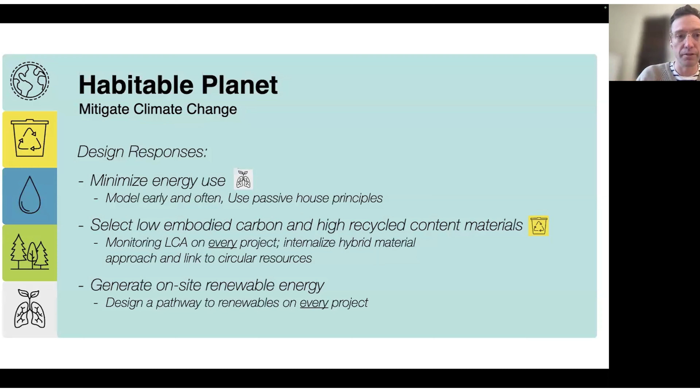Circularity was about, how can we be sensible about the stuff we already have, reuse it, and design for a future where our designs are the stuff we'll already have, and being conscious of that kind of time cycle, both forward and back. And you can see these little icons on here. It was even interesting to us as we developed these criteria and developed metrics for them, that they started to become very intersectional, like these different buckets of assessment were supporting each other.

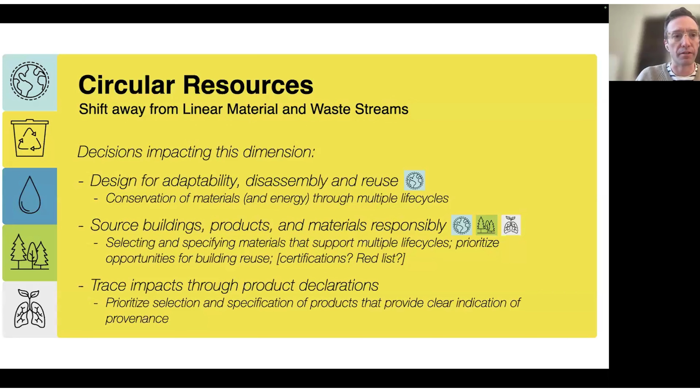And of course, we know that a little bit from passive house just through the attention paid to ventilation and how beneficial that is, both from an energy standpoint, but also from an occupant health standpoint, right? And that was like the kernel of this, to create some sort of intersectional framework. It extended through to water, being sensible about protecting our water cycle and mitigating potential impacts from the water cycle and into the building. Resilient ecosystems, so thinking more locally about the site around the building, how we can be very careful about our human-only footprint, the same way we're very careful about our human-only energy use, right? Again, starting to create these parallels between different things.

And then lastly, and honestly, this is the one that excites, I think, more of our clients than any other, is an attention to the stakeholders we serve. So ultimately, as designers in these projects, we're tasked with creating a reality that is hopefully a positive impact for the stakeholders' lives that are going to use the building. And that's the case with any scale, right? It can be all the way down to residential, all the way up to large public buildings.

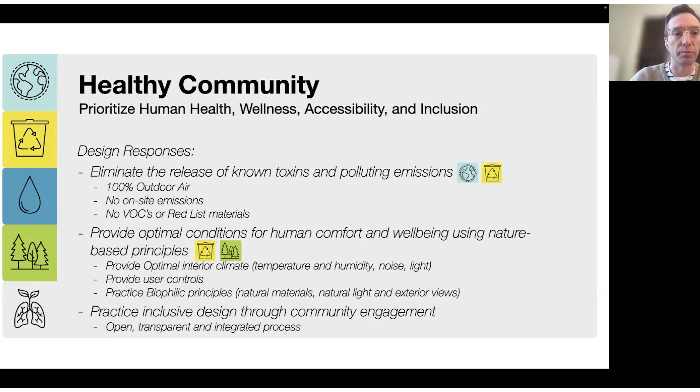And for most of them, there's a very low hierarchy of need. It's like, I want a safe, healthy place for my community to go and participate in whatever activity we had in mind. And so developing criteria around here is some of the ones that actually become our single greatest outcomes to our clients in the end, and often are supported by some of the other buckets as well. And we use that to benchmark all of our work.

So we have a spreadsheet that we've developed that uses numbers across all those categories based on current best practice, and try to see if we can hit that kind of passive house threshold of 80% impact reduction in any of those categories. And I mean, this is really early on and we made it up, but it's a great tool for trying to see if we can progress beyond just our closed systems assessment of passive house as a standalone certification, and expand that kind of idea into other territories. And so we've been doing that for a few years.

And what we started to realize is that maybe our biggest challenge on that is around that first category, and how do we holistically look at a habitable planet and reduction of emissions in a world that is changing the way we produce energy, right?

So we talk a lot about that 40% of global emissions, and there's a lot of internal debate in the design fields about, is it 1/3 embodied, 2/3 operation? Is it 1/5 embodied, 4/5 operations? Is it half and half? Are we projecting towards that goal?

I don't really care. If I'm thinking about the damage of emissions from a building, I'm thinking about the 40% in general. And my ethos now is that, honestly, the debate between embodied emissions and operational emissions, although it might be beneficial to certain portions of our industry, is actually not beneficial to the overall thrust of getting that 40% part of the pie to be smaller, right?

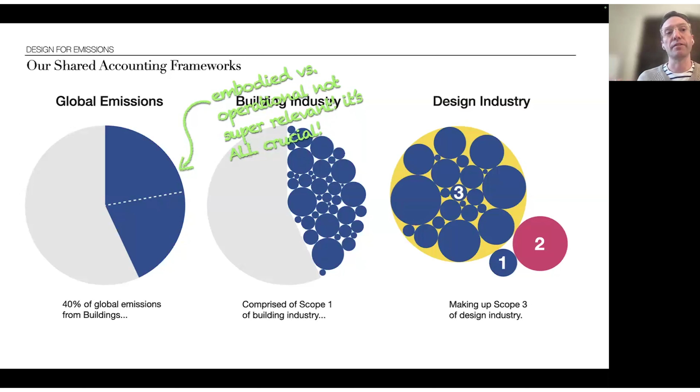We have control as designers, as builders, over that 40%. To me, I see that as an opportunity. And debate about where the split is not as important, I don't feel. And so the thrust of our practice is we need to look very whole life at carbon, because if we don't, we're going to miss opportunities to potentially just use less stuff, right?

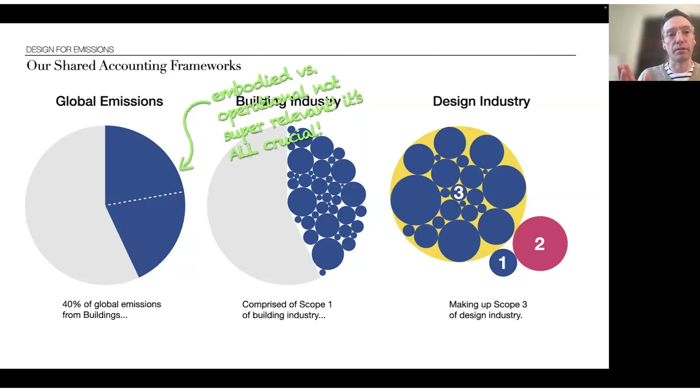And if we are focused headlong on this debate between the resources and the materials and the energy we use, that is infighting that doesn't allow us to reduce the 40% as a total. So we adopt the current methodologies as quickly as we can. We're very involved, me especially, in discussions about how those methodologies apply to practice, and how to make sure that we educate people that are new to the methodological approach to whole life carbon assessment, so that they can adopt some of those practices into their practice.

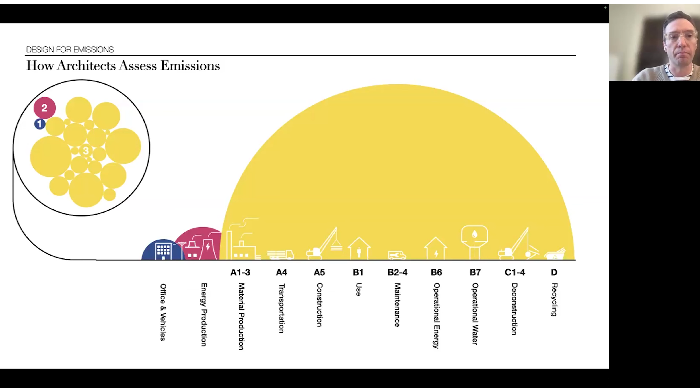And we look at the usual criteria. A lot of you have probably seen all of this, the usual modules for the scope 3 of our work as designers. So that's the designs we make that get implemented in the world. And we look at it across the usual modules for life cycle assessment, module A through D, material production, all the way through potential for recycling. So today, I'm going to just give you a brief update on where we are at in the way we apply that, and then we'll look quickly at a project case study.

So we always start with the standpoint that our models are definitely wrong. Some are useful, but we need to keep adapting them. We need to keep doing them because it allows us to make that information as useful as possible, but with the understanding that they are going to be incorrect, and reality is going to tell us something that will allow us to inform it better.

And we follow these rules. We want to find common units. We want to be mutually exclusive and collectively exhaustive. We don't want to leave things out on purpose. And if we need to make assumptions, because that's the difference between leaving something out or not, that's fine. But we want to be conscious of the assumptions we're making and be clear about that.

So that led us to adopting, at least as a framework for now, what we see as the most thorough methodology in whole life carbon analysis in the world, which is, I feel, the RICS standard. So the Royal Institution of Chartered Surveyors in the UK published this assessment, with some edits as recently as July of this year, for whole life carbon assessment in the built environment. It's a very thorough document, maybe not quite as long as PHPP, but it's close.

It's about 190 pages. And I would suggest to anybody that has questions about any of the different modules that are used to measure carbon, this is a great educational document too. It explains all of them very well. It explains in clear methodological terms where the boundaries are, at least in the way that RICS has established them, which is really helpful. I've found it to be very helpful as a design tool, as helpful as PHPP. And so we have our unit of measure.

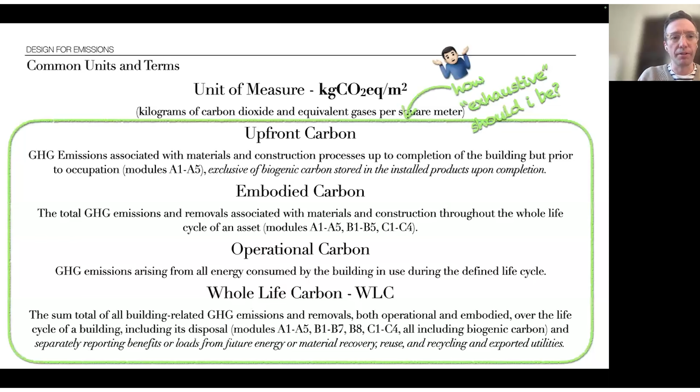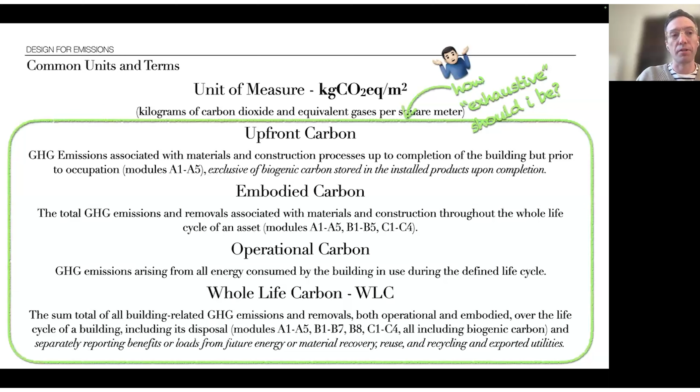So we have our common unit now, and we want to think about how exhaustive we should be, right? So let me just go through some quick different framed mindsets that we've had in the past and our trajectory towards more ecological buildings when thinking about emissions specifically and just sustainability in general. So the best relationship that I can draw here is, again, now we're going to talk about the burgers. We're finally talking about the burgers, and it took a few minutes, but we love a cheeseburger, right? Tasty. We know it's not healthy, right?

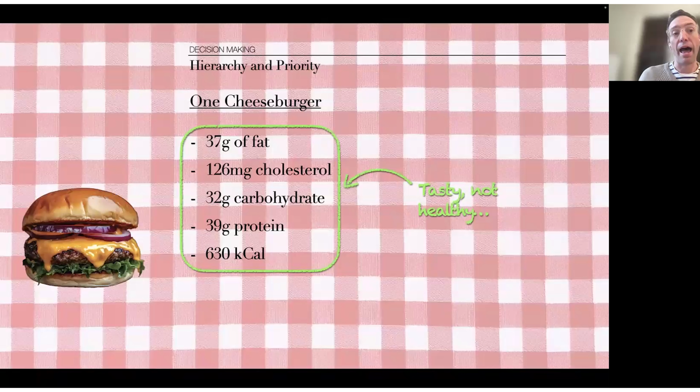We can measure the nutrients that go into that and the amount of energy that's in a cheeseburger, and we know that it's probably more energy than we need for most of us, and so it's maybe an unhealthy choice as a food. And I think when we think of early sustainability, I'm talking like 30 years ago, I think the strategy was, well, what if I just put way more vegetables in the burger, right? Like, I don't know how to make it more healthy, and I still want to eat it, but I'll put way more vegetables in it because that's the healthy stuff, right?

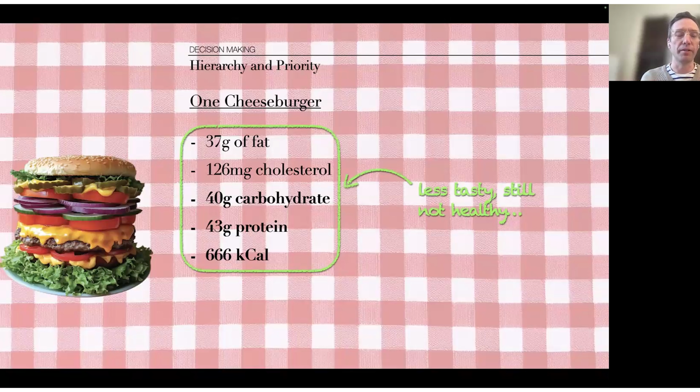I'll put in some zero VOC flooring, and maybe there'll be a wind turbine on top of the building, and it'll be healthy. Well, all you really did is make it something that's less tasty, and it's still not healthy. It's actually more calories because you've added stuff. I think that's a really important point. When you're thinking about carbon, being additive is almost always worse. And it's a very rare case when you're doing whole life cycle assessment that adding things actually brings a number down. The other option is to take the most unhealthy thing in it and swap it out with something healthy.

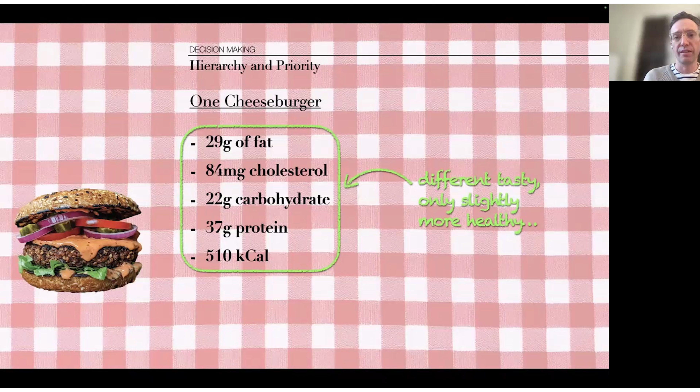To me, this is like the thrust of mass timber right now, right? It's like, well, what if I just change all the steel and concrete to wood, right? Like, that'll be good, right? Well, it tastes a little different. It's maybe slightly more healthy, but it's not really getting at the meat of the problem, which is that, bad pun there, you should probably just be eating less burger, right? That's a 50% reduction. Just eat half a burger and it's just as tasty.

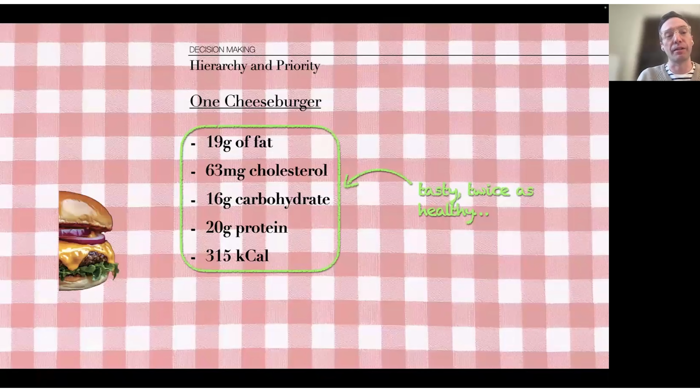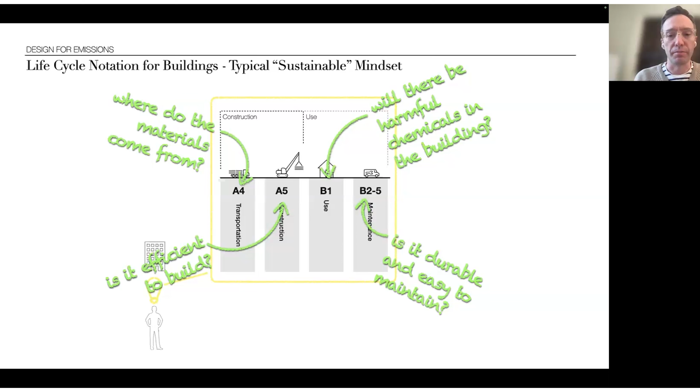So I think we want to try to take that same mindset when we think about those modules that we looked at. So if I take the corollary to the basic cheeseburger where we were 30 years ago, when we talked about sustainability, typically we're talking about: are the materials close to the site? Is it easy and efficient to build? Will there be harmful chemicals in the building, and will they be durable, right? These are the kind of basic things that we talked about.

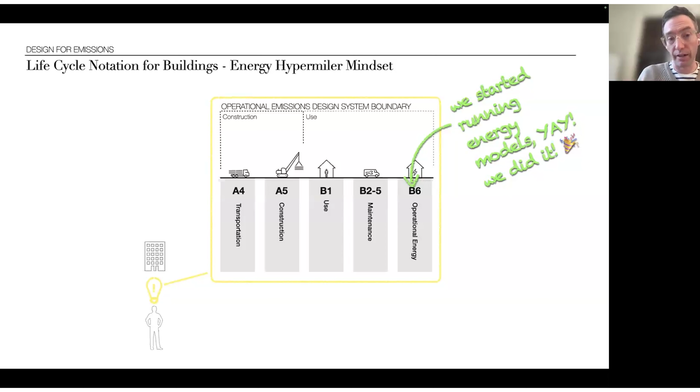And then Passive House came along, and we added in an energy component. That's B6 in the LCA parlance. And I think for a lot of people, it was like, oh, we did it. That was huge. Look at how much energy we've reduced, right? We could entertain this hypermiler mindset that came from really fuel efficient cars, apply it to buildings, super successful. But a lot of people, I think, stopped there, right? And what we're saying is we really need to look beyond that.

And so then LCA became a thing. But somehow when life cycle assessments started happening broadly, people stopped doing some of the other stuff, right? It's like, okay, I'm looking at this full life cycle now, but I'm going to start ignoring energy completely because I'm doing this other thing. I'm doing embodied carbon.

It's like, well, technically, operational emissions are part of an LCA. Like, you're deciding to ignore them. So that B6 operational energy should also be reported, not ignored. And people were taking kind of grossly overestimated reductions in things like the recycling category in module D, which is technically outside of the boundary of the life cycle of the building. It's a projection as to something that could happen in the future. It's certainly not mathematically something that we should be taking as a reduction now.

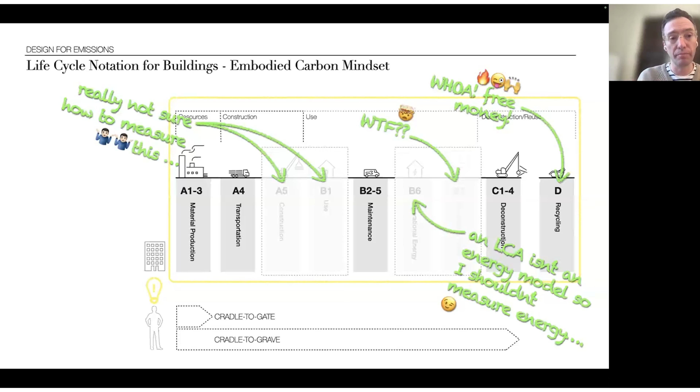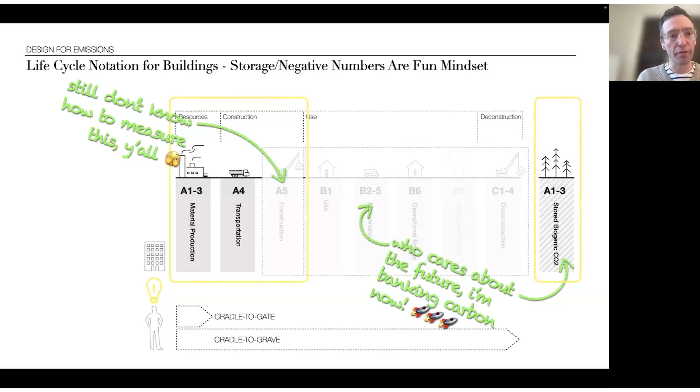And now people are kind of coalescing around this. Sometimes now we also see things like an effort to do upfront carbon storing, right? But when that happens in deference to actually measuring the full life cycle of the building, you'll get other false numbers. And an organization like RICS has gone to lengths to describe why mathematically and from a scientific approach, stored biogenic carbon in the building should not be treated as a negative number in a mathematical equation that leads you to a total.

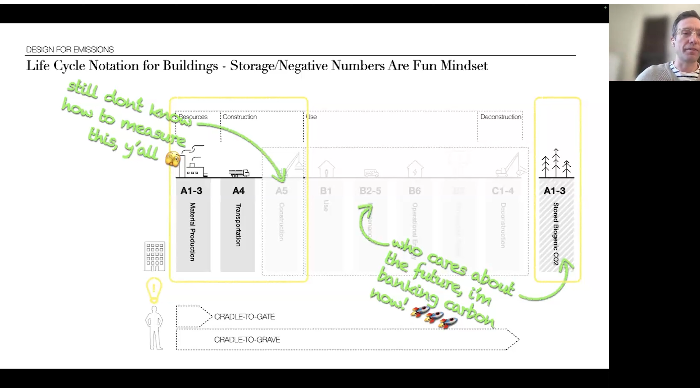So when they do upfront carbon, the methodological approach is described quite clearly, that you can show the amount of biogenic carbon you're storing in a building as a separate negative number, but it shouldn't be reported in the same addition if you're only reporting upfront carbon, right? So you're making a decision in that case to do half an equation. So if you're going to do half an equation, you can't get credit for the part that's going to get re-released down the road when the building decomposes. So some kind of critical things here.

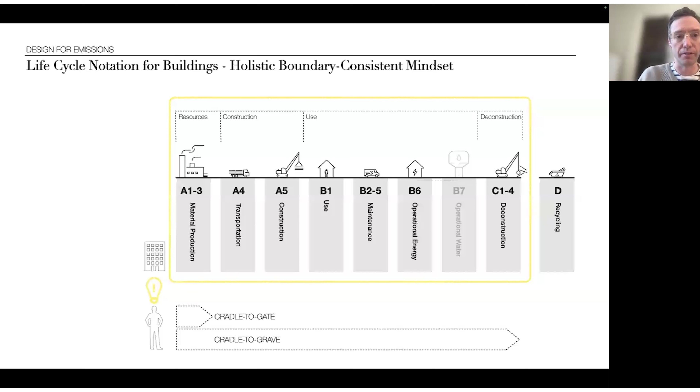So for us in the office, we're really only ever looking at the full life cycle module, and we're very exhaustive in how we get there. And we're also not reporting module D, that recycling component, as part of the total, because it is outside of that system boundary. Again, that comes from the Royal Institution of Chartered Surveyors guidance. We're starting to see more organizations and researchers move in this direction. So RICS, as we've talked about, that's the methodology that we follow right now in the office.

But ASHRAE 240P is supposed to come out next year, which is going to be following some similar guidelines. ILFI is going to have a new zero carbon certification that is much more whole life based. That's exciting. ECHO project just released in the last month their methodology on harmonizing, and it follows a lot of the same guidelines for whole life assessment that we see in RICS. And then things like the CARE tool, which really emphasize the idea of thinking about buildings as circular and reusable, and decision-making related to that harmonization component between energy use and resources. So that allows us to make decisions about being collectively exhaustive.

And we need to think then about our assumptions next, right? Because if we're measuring all of this, there's plenty of these categories where we don't yet have enough research or data to model it with an LCA tool. We have to use either guidelines or estimates that are created often by outside groups. So when we're doing WLCA in our office as designers, there are big firms that can do this in a more dynamic way, but when we're doing it in our projects, we have placeholders for certain parts, right? So things like MEP systems, right? How do we measure the impact of those? We have to use an assumption for that.

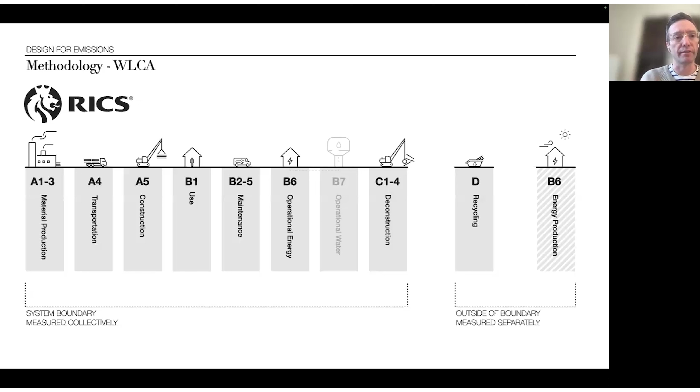And we're being very careful when we do over energy production that's moving out to the grid. That's technically a different scope, right? It's not part of our system boundary. And so being careful to not use that as an offset all the time. We also want to think a lot about time. We do that in this office too, like that we are following some of the guidance.

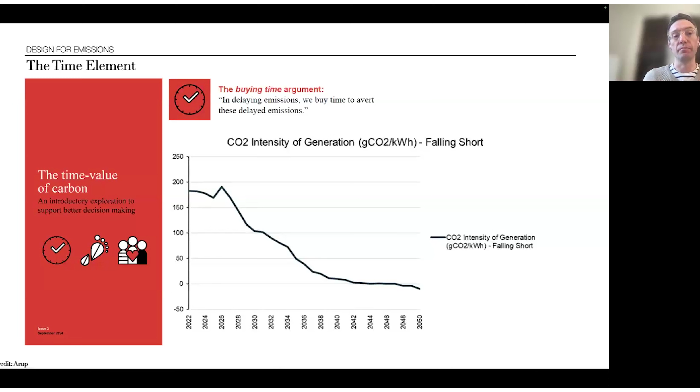I'm going to share some stuff that came out in one of Arup's papers from September that was describing time value of carbon and pressure to acknowledge that we have a decarbonizing grid. We know that, and that is falling off. So there is some mathematical appropriateness to valuing the carbon spent now over the carbon that will eventually be spent later, because it will allow for the grid to decarbonize in the meantime. There's also the reality that through radiative forcing the planet is absorbing carbon as we emit it, not at anywhere near the same rate, but it does have a mathematically significant value. And so we also are trying to pay attention to that too.

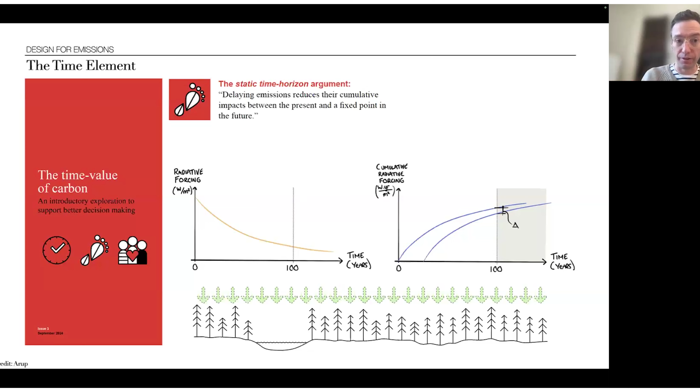That I think is critically important for a passive house audience, because as the grid decarbonizes, and as we consider cumulative emissions, which passive house mainly deals with for energy use, we need to think about how passive house itself situates itself in that world. As we are decarbonizing, energy use will become less and less impactful. It's still the primary and most impactful change you can make.

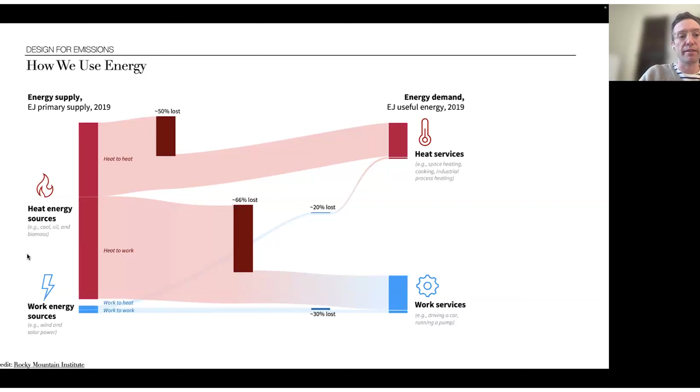So we need to recognize that as passive house designers, because a lot of the formation around passive house was based on an assumption that creating energy was necessarily a negative impact. And it still has negative impacts in overproduction, for sure. That's a separate topic. But the difference in the fossil fuel combustion is starting to change and will continue to. So that gives us our assumptions.

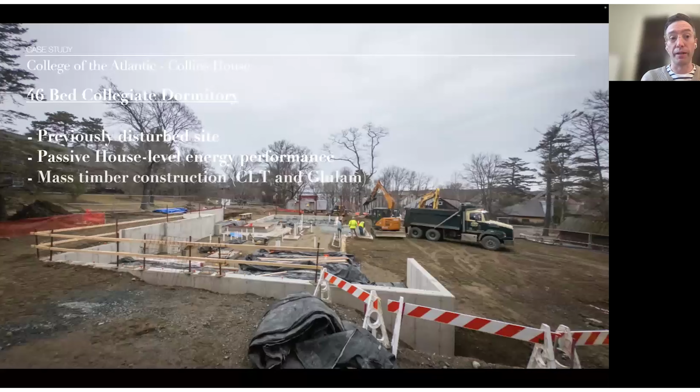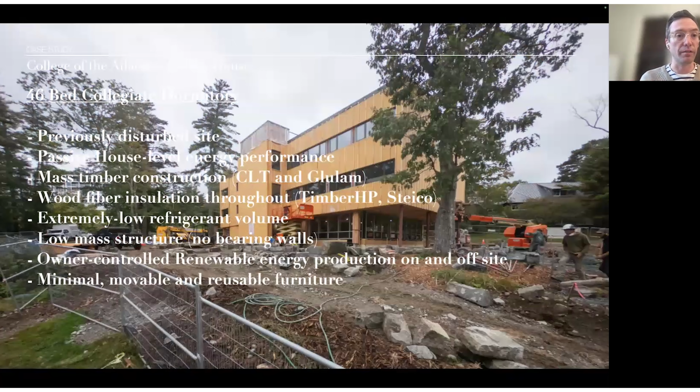I'm going to share with you this project, which is the first project that we were able to apply all of these approaches to a single building. This is the College of the Atlantic Collins House, which is a passive house level energy performance, all mass timber construction, CLT and glulam, wood fiber insulation throughout from Timber HP and Steico, extremely low refrigerant volume. We were looking at fugitive refrigerant loss in this building as well, again, being holistic.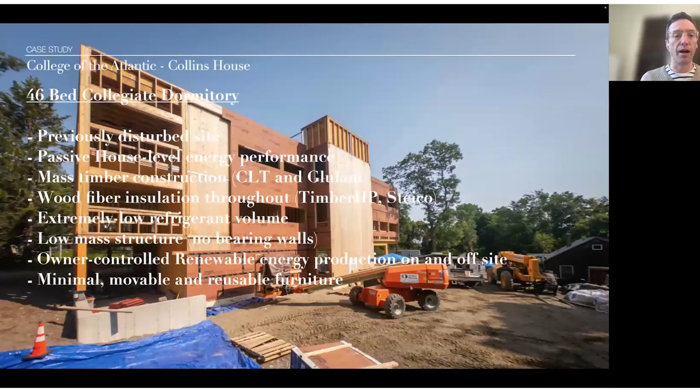The low mass structure, so there's no bearing walls in this building at all. There's shear walls, but no bearing walls. An owner-controlled renewable energy production on and off-site. So by off-site here, I mean about 3 miles away, so it's in the same general zone. And then minimal and movable reusable furniture.

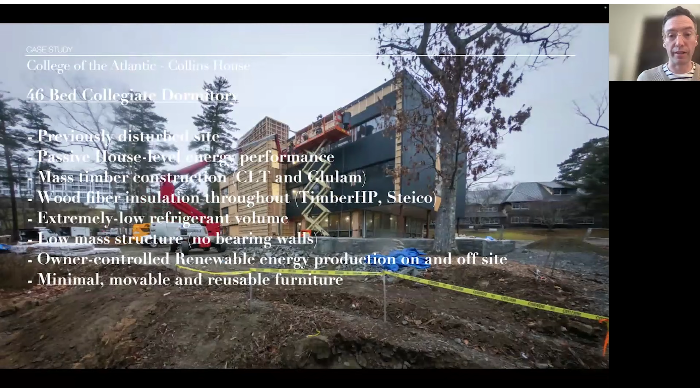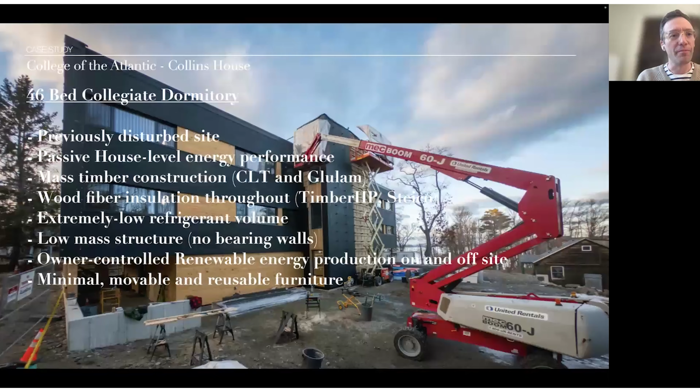So this was a really exciting project to actually have a client that was willing to entertain the opportunity to try all of these things and let us do that behind the scenes, and was interested in seeing the results of that. And other things as we watch this building get built as fast as any building ever. The site was also a previously disturbed site. Oh, I said that already, but the ability to maintain an existing ecosystem was possible in this building as well.

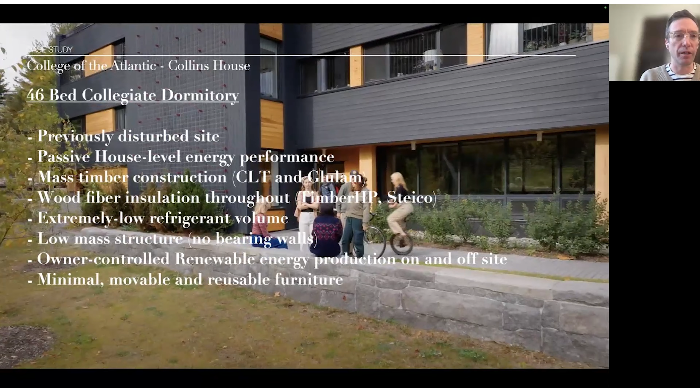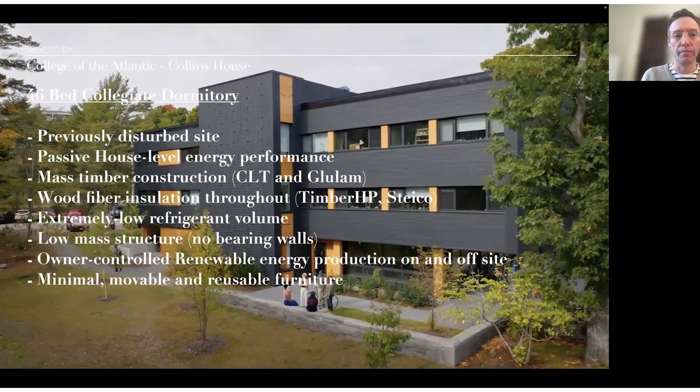Project is in Bar Harbor, Maine, across the street from one of the entrances to Acadia National Park by trail and on the Atlantic Ocean. It was also exciting because it's a project that was our second project on this site with the Davis Center for Human Ecology just up the way on campus.

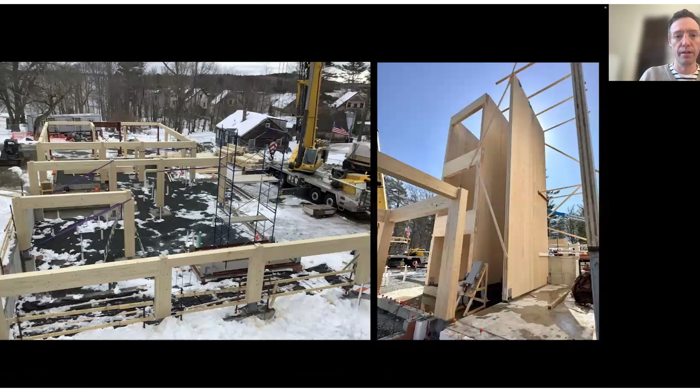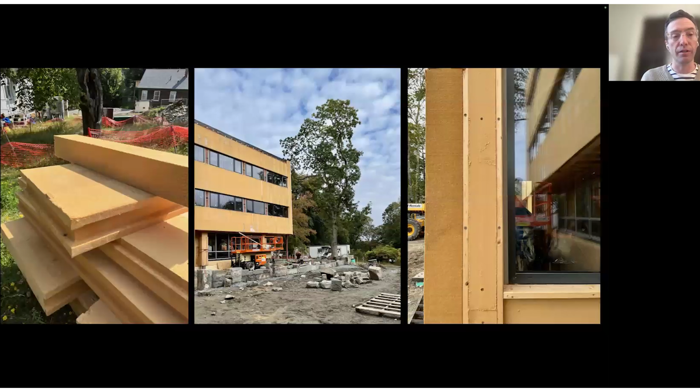The erection of the CLT and mass timber, this is the CLT and glulam structure, happened over the course of 3 weeks, and also allowed us to significantly reduce the amount of concrete in the building by point loading the system. Again, it was an all biogenic insulation solution, in this case wood fiber, both inside in the stud cavity and outside with the rigid board.

And we were paying special attention to make sure as many of the systems as possible were surface mounted if we could, so that we could try to make this building something that could be deconstructed and didn't have to be demolished. A lot of unfinished surfaces or minimally finished surfaces, that helped. The CLT certainly helps that a lot.

Communal cooking: it's a dorm building, but it actually is on a campus which does not have full meal service the whole week. So the students also need to be able to cook here. So we were trying to do that in a collective way that reduced the impact of that service. And then again, exposed systems to try to reduce the amount of material usage.

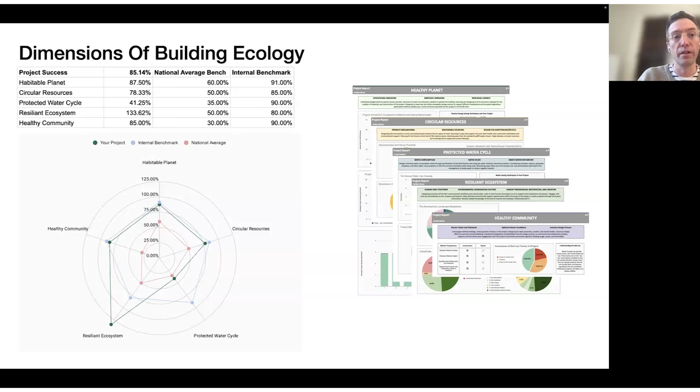And we ran this in our own framework, and we were able to see some results that were exciting. In most categories, we were able to achieve our 80% goal. We learned that on water cycles, a lot of that is so outside of what we can control, especially when we're doing a larger building that's connected to city water, but it was helpful to analyze it and test those assumptions so we know going forward what things we could do to try to change that.

And then we assessed it both in an upfront carbon methodology and in a WLCA methodology. So here's how you start to see those differences, right? In upfront carbon, if we only measure to the opening of the building, even with measuring the construction emissions, we're actually getting a negative number from all of that biogenic storage. And it's why RICS doesn't recommend measuring those together, because the reality is this is not a negative carbon building. I would contend that it's not physically possible right now to build a zero or negative carbon building.

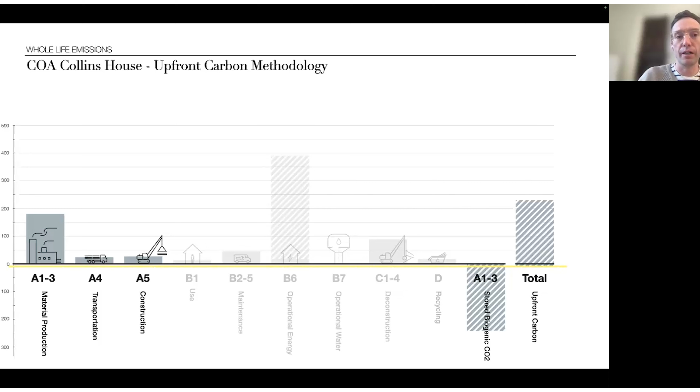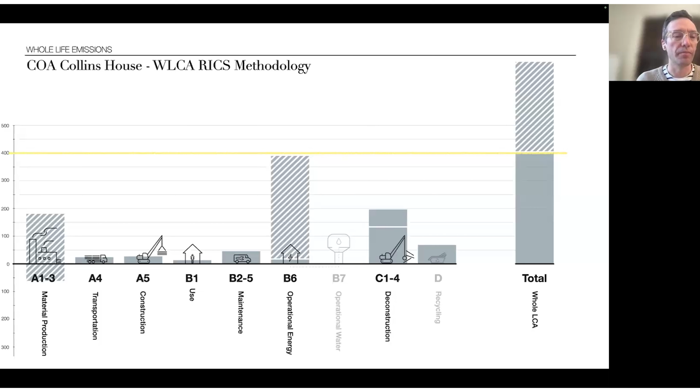But when we go to WLCA, and I include things like the full life cycle, the deconstruction of the building, you can see how big that C category is. And the use of the building, particularly the refrigerant leakage, is pushing it into something that is definitely positive. So we came out at just under 400 kg CO2 per meter squared.

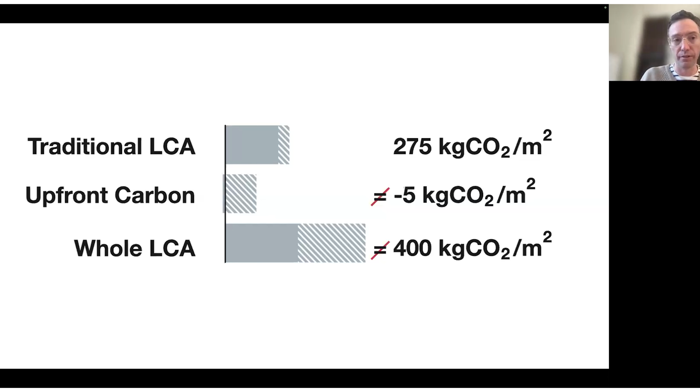But the reality of that was that, even though they're not equal, this is an important slide for everyone: traditional LCA, upfront carbon, WLCA, if I run all of them on the building, I get different numbers. To me, when I just think about math, that's problematic, right? The numbers are different, something's not working right. And so we try to just focus on the whole LCA. Trying to pay close attention to reuse on this building too.

We are able to establish carbon budgets now for buildings. So if we think about our total global emissions budget of 230 gigatons of CO2 to stay below 2 degrees, we can track that all the way down within the US or any country into what a single building should use per square meter to stay under that goal.

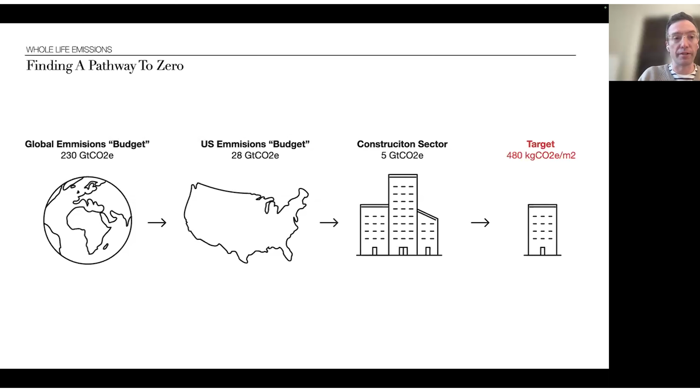So if we look at that, through some pretty simple math, we can get to 480 kg CO2 per meter squared. So even though 400 is a lot more than negative, it was still below this target. But it took literally doing all of those things I just described to get there. So many things to get to that point. The biggest one still is passive house, right? Just the huge reduction of going from a baseline energy use to passive house is massive.

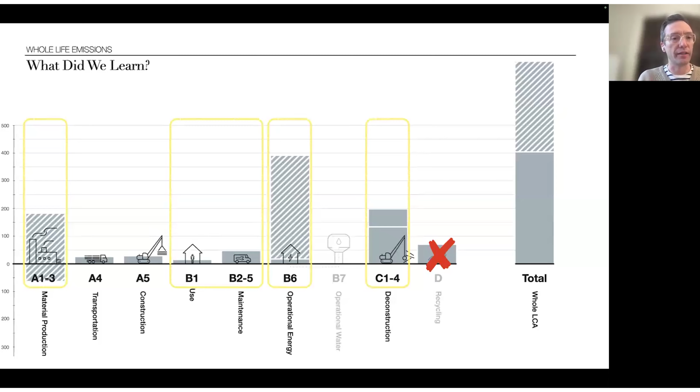But what we want to learn from that is the mental model of being open to doing all of that is probably more important than the modeling itself. It is possible to do a low carbon building, but it takes focusing on those big categories that we just talked about. And we can make these things differently.

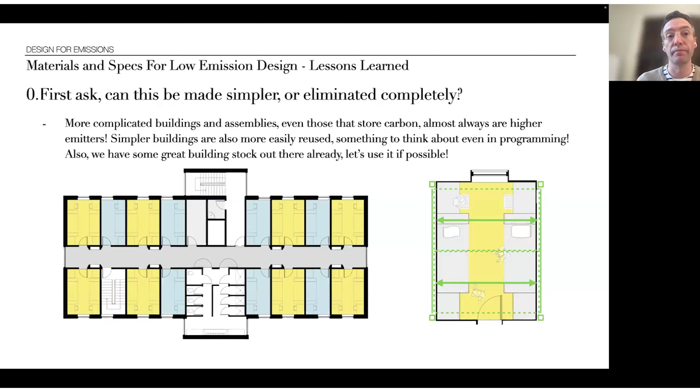So some quick takeaways, and then I'll go to some questions. The first thing we want to ask is, can this be made simpler, right? Simple buildings have a higher propensity to be reused. So when we did this project, we focused on a standard grid, but something that could also easily be adapted to other programs because it doesn't have bearing walls. This could become a classroom building if it needed to be. It could become an office building if it needed to be.

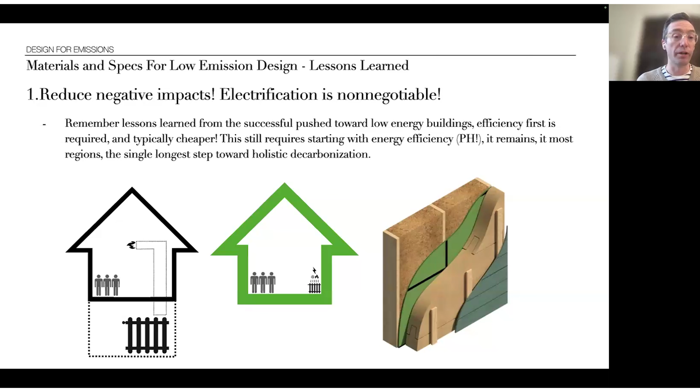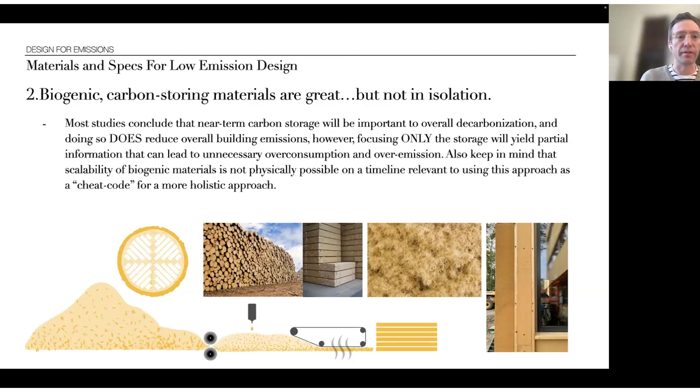We want to look at biogenic carbon storing materials, but not in isolation, right? We can't just swap the hamburger for the veggie burger. It's not enough. It doesn't actually create a significant reduction on its own. Now, working together, you can solve two problems with biogenic carbon storing materials. You can short-term store and still create point-loaded light systems that have a low emissions impact, but you have to be considering both at the same time. Otherwise, the number doesn't change much.

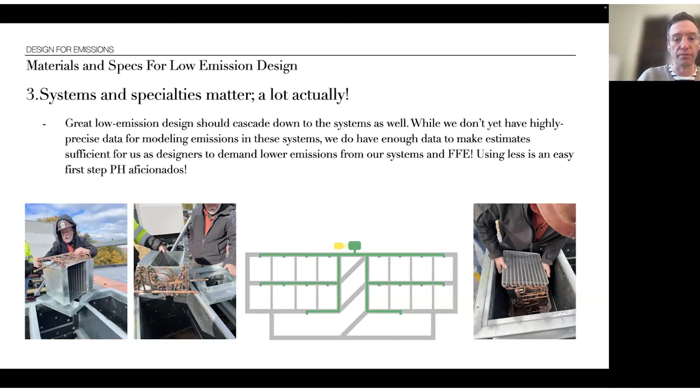So that's true for both the insulation and for the structure, right? Think about both. We want to pay a lot more attention to systems than we have been. They have a significant impact, not just things like refrigerants, but the systems themselves. That data is really new, but there's enough to make estimates. And for things like refrigerants, there actually are online calculators that I'd recommend people use. So MEP 2040 has an online calculator for refrigerant leakage, and I'd really recommend people use it.

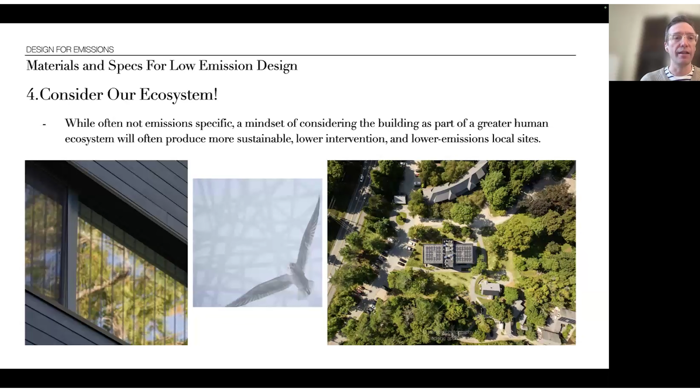We want to consider our ecosystems. They're not emissions specific, but responsible habitat attention can yield sites that are less emissions impactful because they use more resilient plants that need less irrigation or no irrigation, and they save local species. Things like bird safe glass and low intervention landscaping, to me at this point, is also almost a non-negotiable.

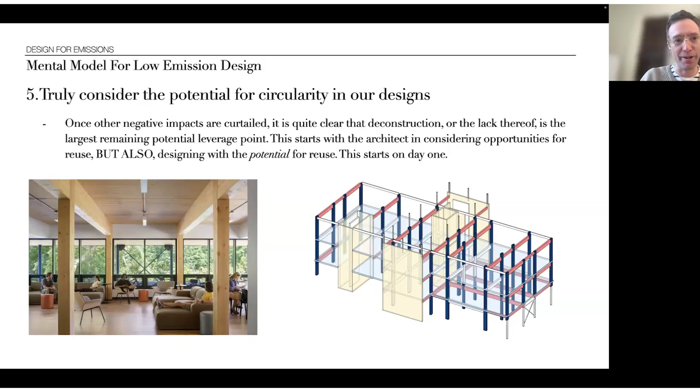Perfect. Thank you so much, Tim. I just want to reiterate that we dream of a zero carbon building within our lifetime. And I think that measuring that and starting to have standards for what that looks like is how we get there. So thank you for sharing this and also for sharing so many resources and tools along the way. I think that's going to be really helpful for a lot of people here.